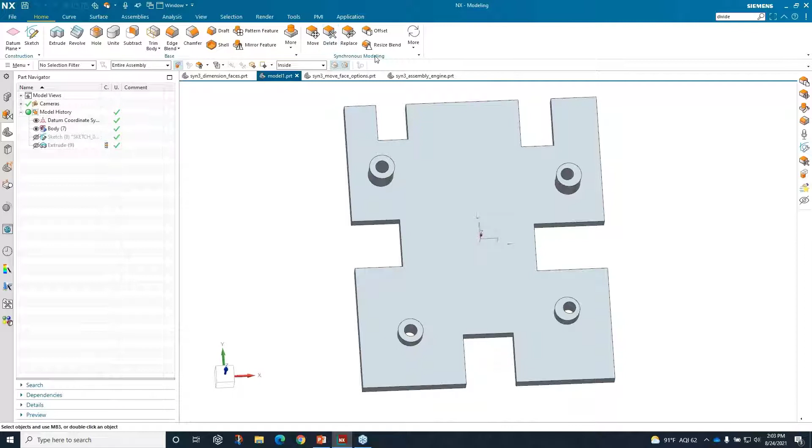So now let's jump into the subject. Turk's Tips and Tricks, NX Synchronous Technology. I'm going to pull up my NX. And what I have is just a basic dumb part. Now, I modeled this guy up, and this is what I recommend for everybody when they're going to start playing around with synchronous technology, is that you create some kind of crazy, wacky part that looks like this, and then just play around with the synchronous modeling tools that we have.

So we could click to move a face. You can use the fence select. We've got this nice little arrow here, the steering wheel, where we can move our parts or move this tab or slot around. We could orient that or change the orientation. Let me do that again. And here I'm trying to grab the vector. There we go, change the vector. And you start to get the idea.

When you just play around with it, it's really easy to use and it's quite intuitive. The trick I would say with this is while you're working is just to do it slow to start. Like when I selected these couple of pieces and I wasn't getting quite the correct click that I wanted. Well, that was my fault, not the software's.

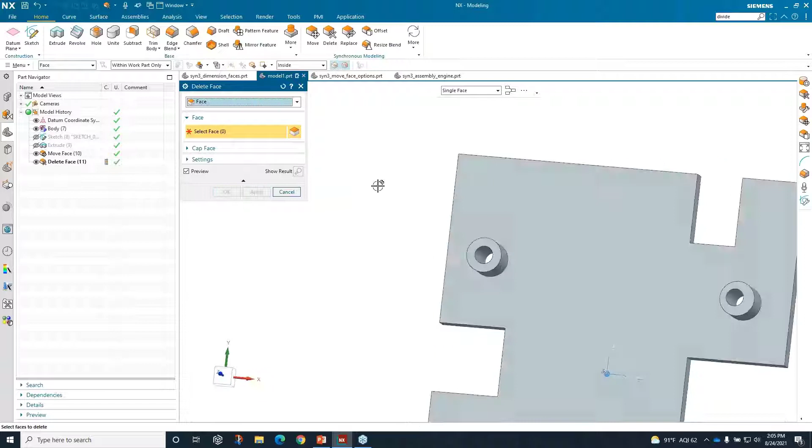Within the synchronous though, when we look at the modeling, at this tab, it's the home tab, but we look at this group of tools. Move, we pretty much get. Delete is really a nice tool, especially when you have a part like this one, and maybe there's just some feature that you want to get rid of. So we'll just select a couple faces and we can delete them that easily. We can select larger pieces and get rid of them.

This works really well if you have a step file or a parasolid that you brought in and you just want to clean it up. Now, there's some other nice tools that we have that what I find is most folks just don't think about using them. I'm going to click on the More button. You can see we've got a lot of synchronous modeling tools, too many to go over today. But check out some of these relate commands.

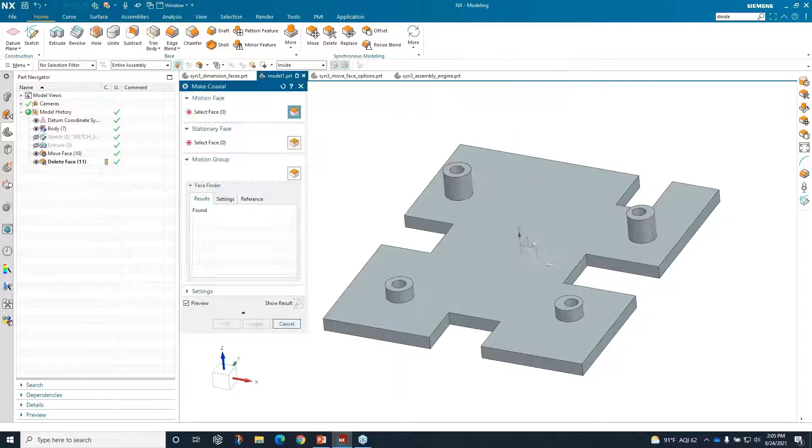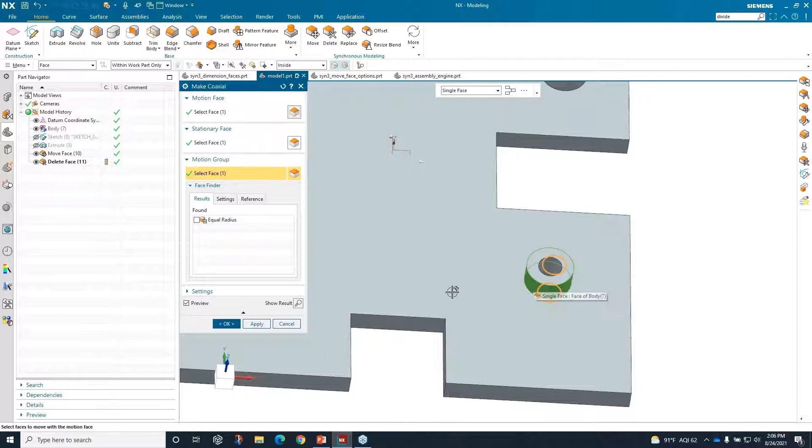Now, what these are is face relationships. So let's just take this make coaxial. Now you can see my part. These guys line up pretty good, but over here, it's a little wonky. When it comes to synchronous modeling, it's motion and then stationary. So what do I want to move? Then where do I want it to move to? What do I want to stay still? And you can see that part, or that hole, drops right in there. So again, I choose the motion face, then the stationary, and it drops right into play.

Let's use some more of these face relationships. How about make coplanar? So again, motion, stationary, that's the trick.

And I'll put another one of those in there. Good.

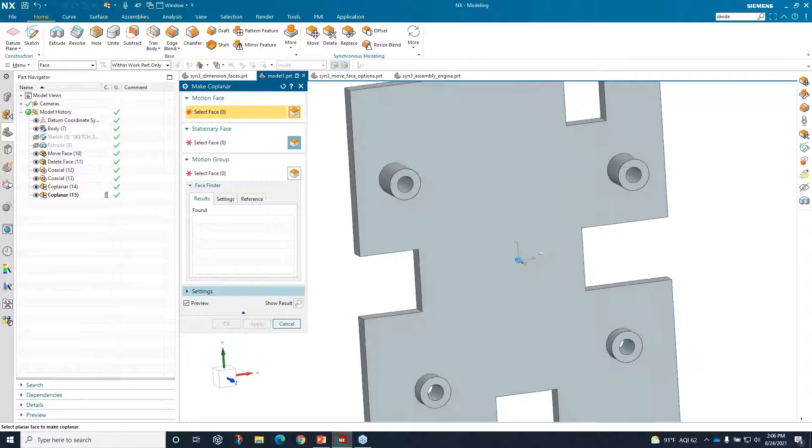This time, I'm going to just take and move one of these faces. Now, were you expecting when I clicked move that this side was going to move as well? Because I put that coplanar on there?

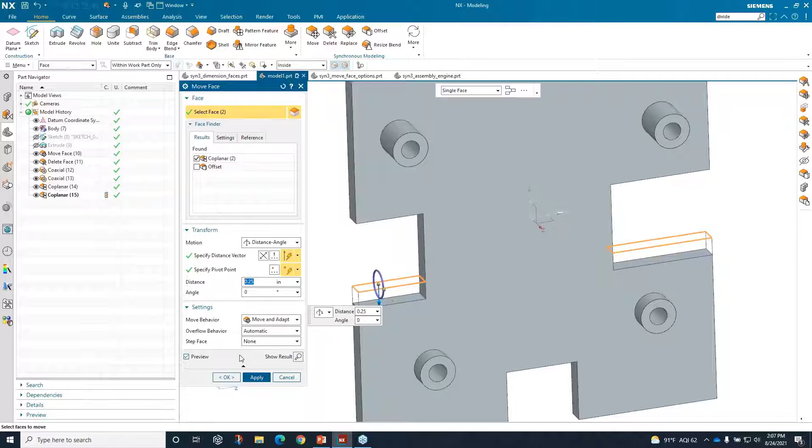If you take a look at the tool palette, move face, we have this face finder, and here's where we can choose if we want to use any of the found relationships. So I'll just click to turn that on, and there it's moving like you would expect. So again, that's the face finder, and it works really well.

We'll just hit OK. When I click back on the more and look at the relationships, we're not going to go through all of these, but just to give you the idea of all the different tools that you have. Let's just use one more.

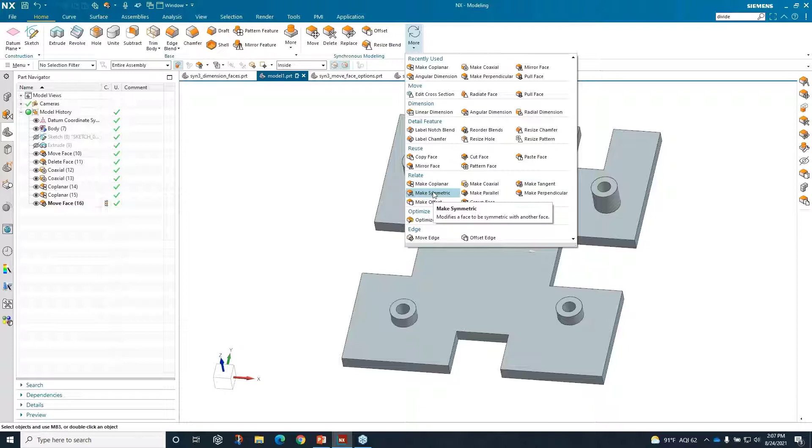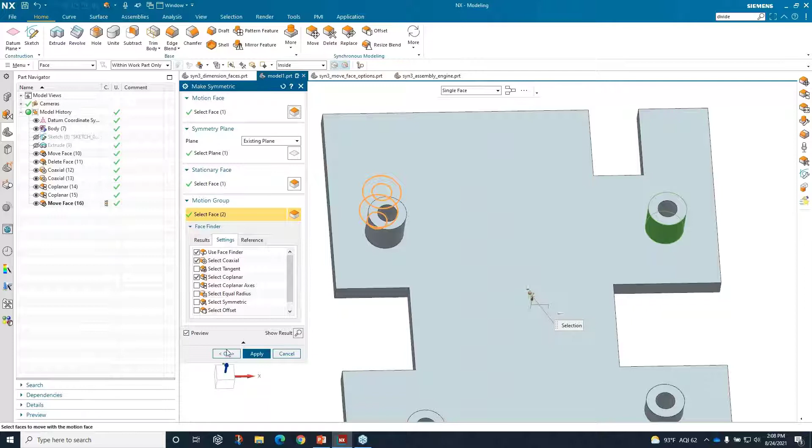How about make symmetric? So I'm going to choose a face to be symmetric. Then I'll choose my plane, which is just the CSYS. And again, the stationary. Notice it grabbed the entire thing. That's because the face finder, we've got these pieces turned on. So, okay.

Those face relationships can really make your job a lot easier. But let's look at another pretty cool tool that we have.

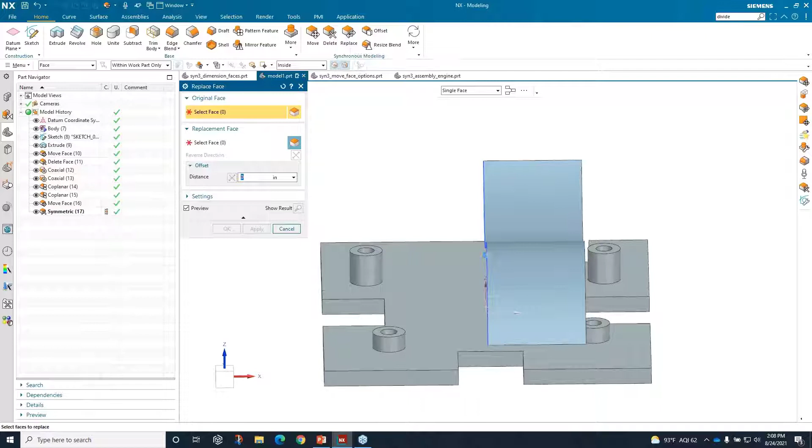I've got this sketch and extrusion. I intentionally had it where the extrusion, this little sheet, it's not actually going over my bosses. But I want to show you this really cool tool called replace. Essentially, it's going to replace a face.

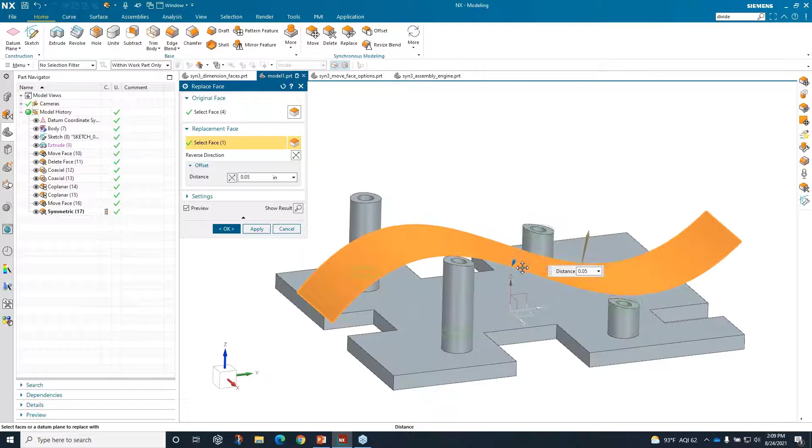So I'll choose the faces, and then where do I want the replacement face to be? I choose that sheet. You'll notice we've even got a little offset in there, or you can go reverse. But the solver is smart enough to know that even if we're not crossing, that's what we can use.

Another area where some folks will use the replace face is on a tab, or I should say a slot like this, although I suppose a tab would work just the same. Selecting one part, then another, and it tells you, hey, you've consumed that face. But it's still knocking it out just the same way that you would have expected.

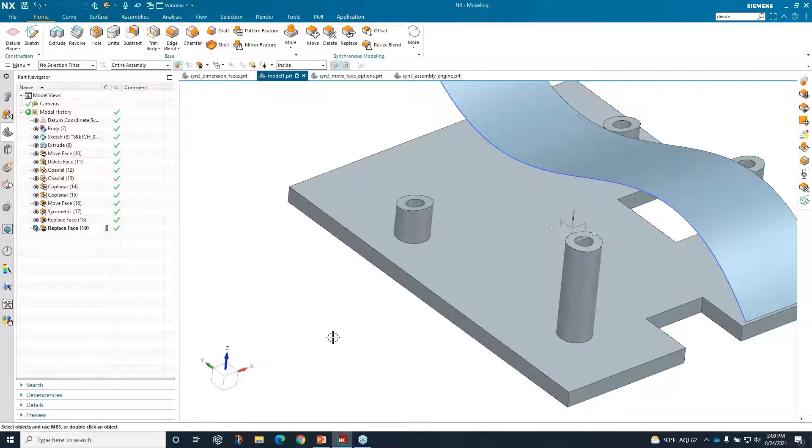So my recommendation, again, for everyone that's going to try to use synchronous, create some crazy part like this. In fact, I'll have my email address up. If you want this part, because it's kind of a silly one, then just send me an email and I'll send it to you. And then you can just play around with it, and that'll help you to get good with the synchronous tools.

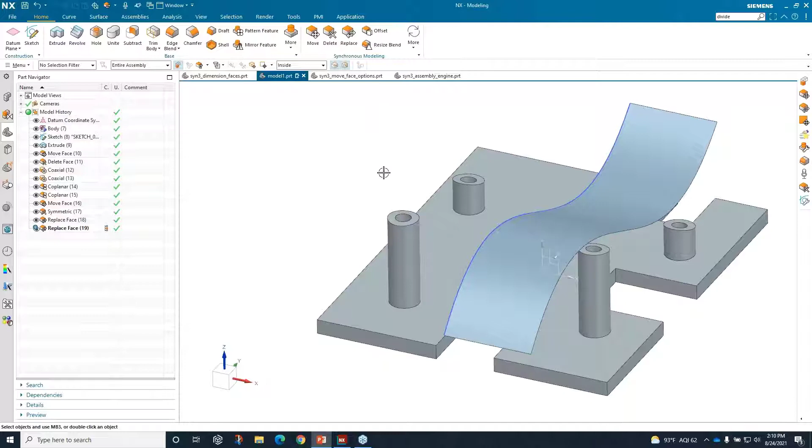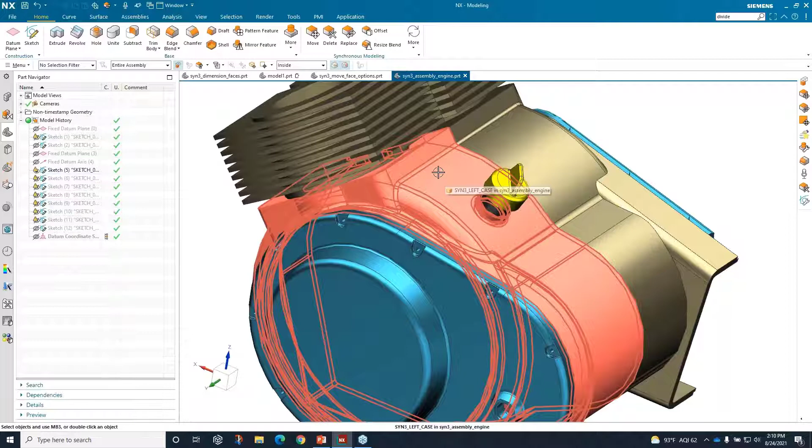Okay, so here we've got this motor. And what we want to do is make some adjustments to this part. I want to change this fill. I'm going to change the location. I want to rock it back, forward, and then angle it again. So I want to make a lot of changes to this little spout.

So I go into the part, just like you guys have done 100 times before, and oh no, the dreaded first part's just a body. Uh-oh. Can I remodel that thing? No, we don't need to, we're going to use the synchronous tools.

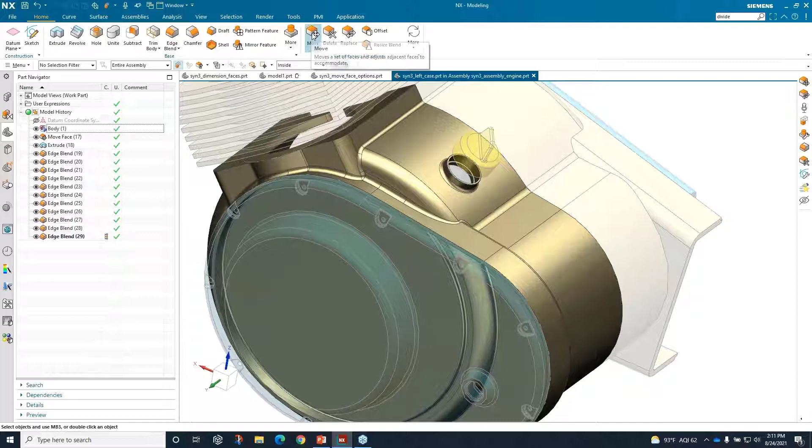I'm going to use move quite a bit because I just want to show you a number of different ways that you can use it. I'm going to put a fence select around my part. Then I'm just going to take that little orientation and set it.

I'm going to say that I want to rock this about an angle. So I choose a vector, choose a point, and there you go. Now you can see it moving.

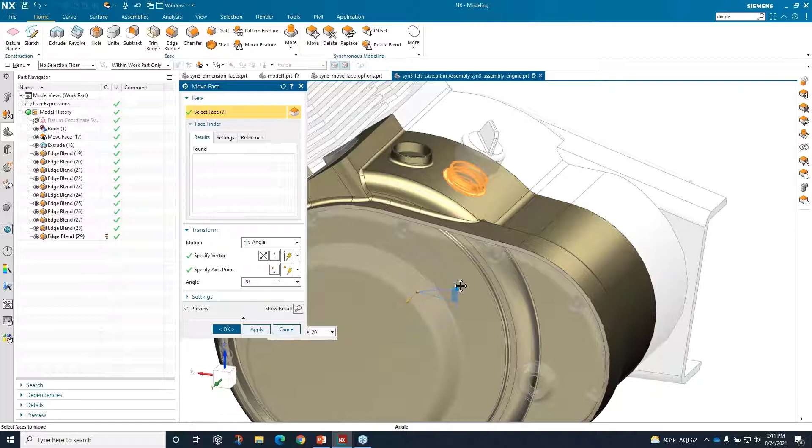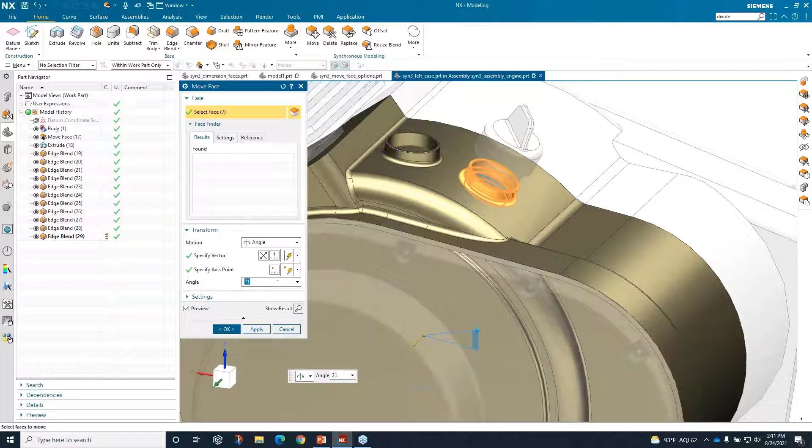I'm going to try to do this slow, but if you look at the part, this is neat how well the solver works. You'll notice as I'm bringing it up to that wall, because I've got a little bit of a radius on there, that the geometry is adjusting. That's not what I want in this case, but I just want to show you that that's what it can do. So I'll just drop that one down.

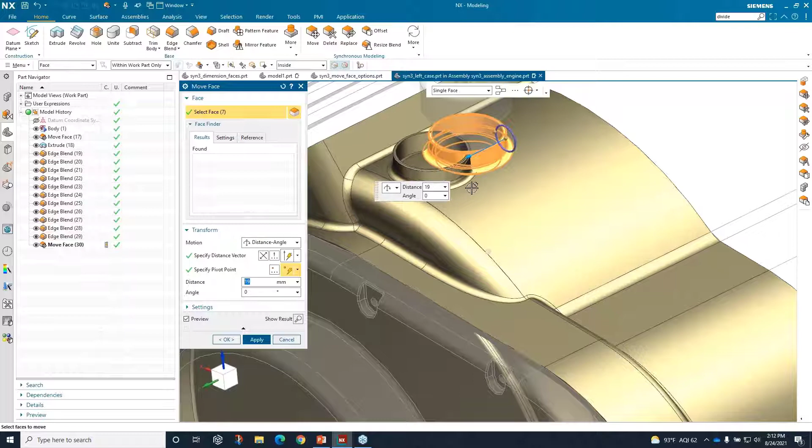And let me move it again. So I'll just do the fence select. This time I'm just going to put it in a vector, a direction. And what I want is I want it to come across that blend just a bit. Get where I can see a little better.

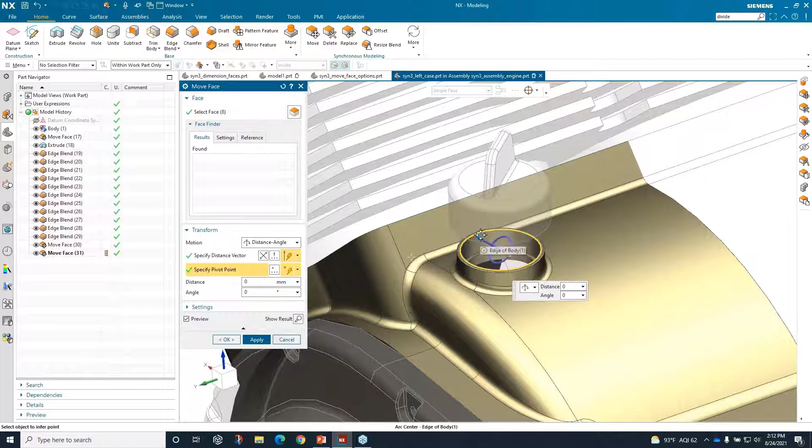And then we want to take this part and rotate it yet again, so we're really trying to break the geometry. I'm just going to set the origin point. Once you click on the origin point, you get this little pop-up giving you the different planes, or as you've seen me select, the different vectors. So I'll choose the XY plane, and then rotate this.

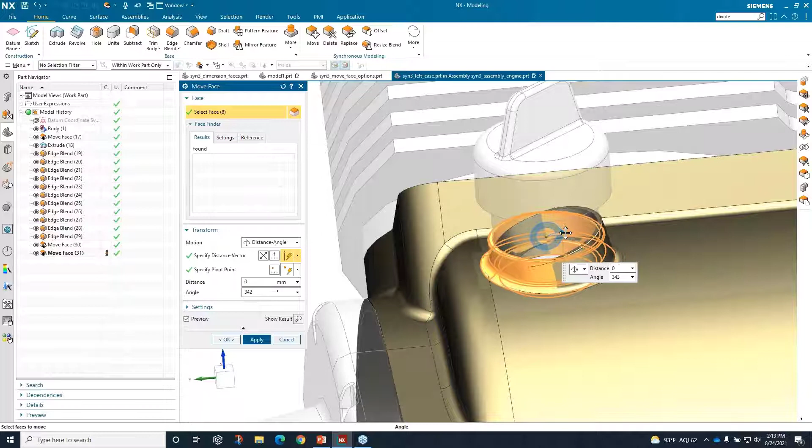Isn't that cool, that I'm able to rotate this as much as I need to? Of course, we could rotate it beyond the point of it being useful. Let's take it to 350 for 10 degrees, and done.

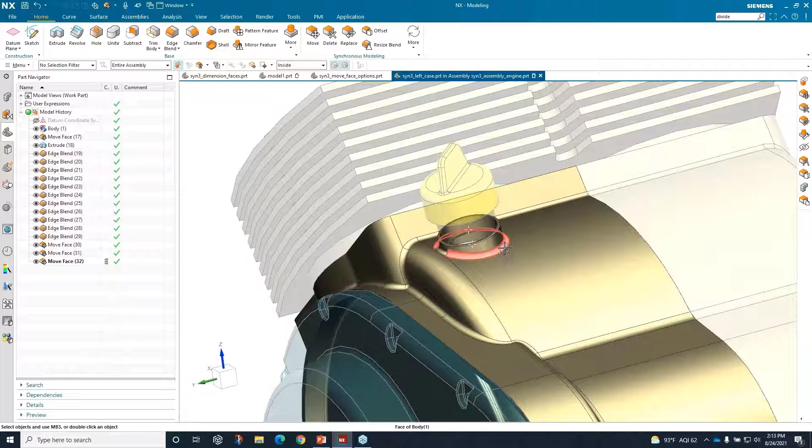Just that quickly, we were able to take that spout, kick it up, forward, and then put another bit of rotation on there. This works really well if you're doing concept work. Maybe you need to take 4 different concepts. Using synchronous modeling, you could quickly create each of them and then just make adjustments with a reference set.

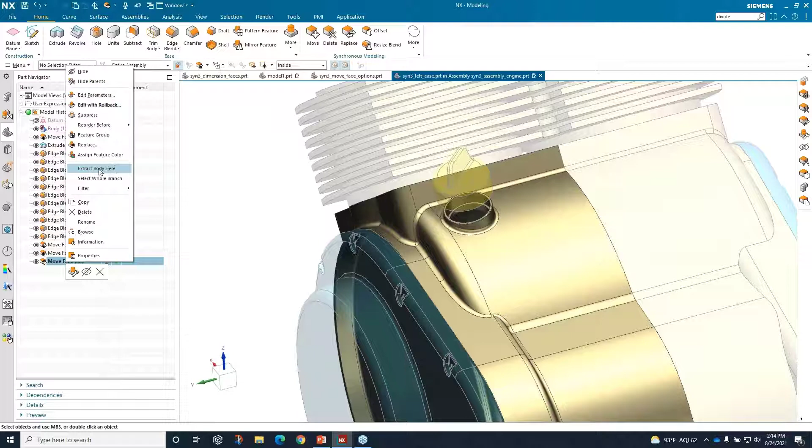And then just to show, if I right-click on one of these features, I can choose extract body, and it simply makes a copy of the body I had just created. I can modify it again, new reference set, and I'm ready to go. So that's not a synchronous tool as much as it is just a really neat one.

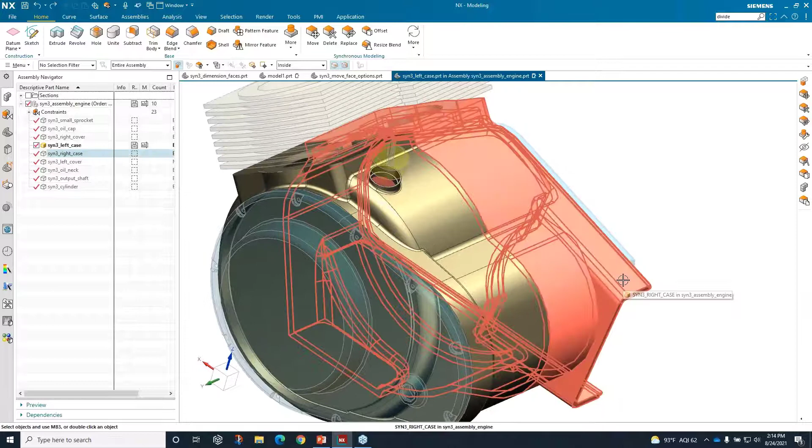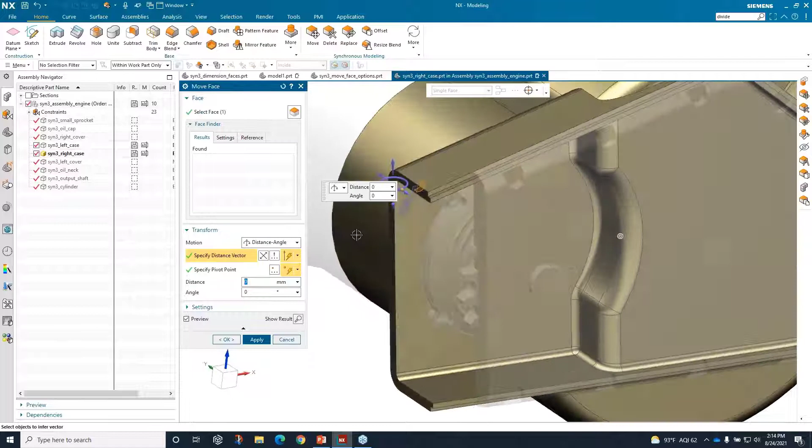Let's stay in this part, and we're going to move another face. So what we want to do is move this face in and just kind of clean it up a little bit. I'll choose move face, and this time I'm going to choose specify distance vector because this face is a little funny and I want to make sure I get it just right. I'm also going to go to my settings and choose extend incident face. Just something else to note, it gives you a little preview of what each one of these will do.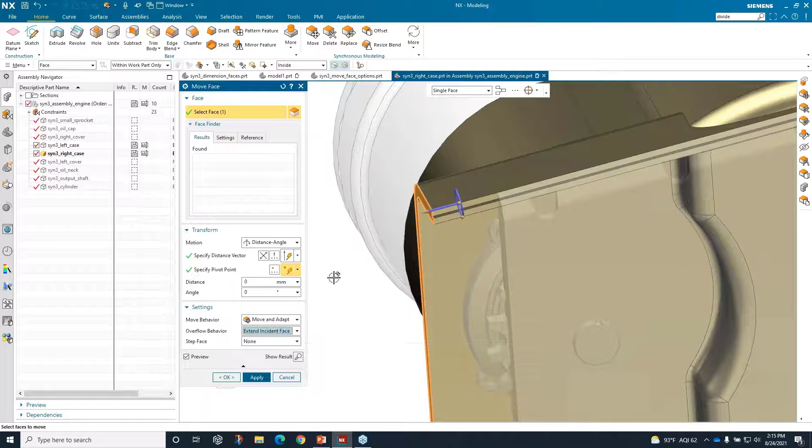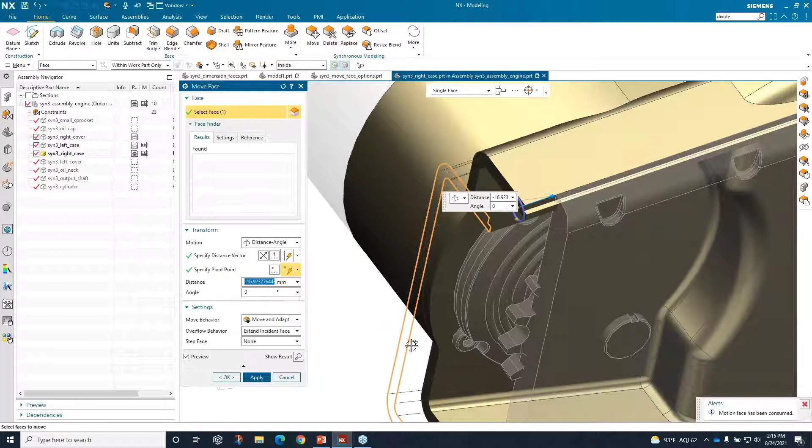And then when I go to my distance, this time I'm going to right click and say snap to an object. I don't know what the distance is between these two, but I don't really need to know, I'll just snap right to the object. The face goes back, but here's the key using that extend incident face: it takes and it hugs that cylinder, or hugs that radius. So now my part is looking like I would want it to, and it only took just a couple steps.

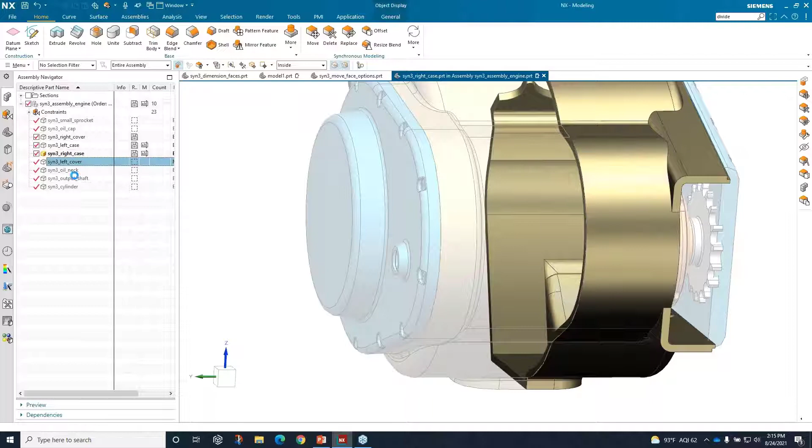Let's briefly go over to our cover. Now here I just want to show you, we've seen the move. So if I choose this move, do you notice the thickness is changing? So that's move, you're literally taking a face and moving it.

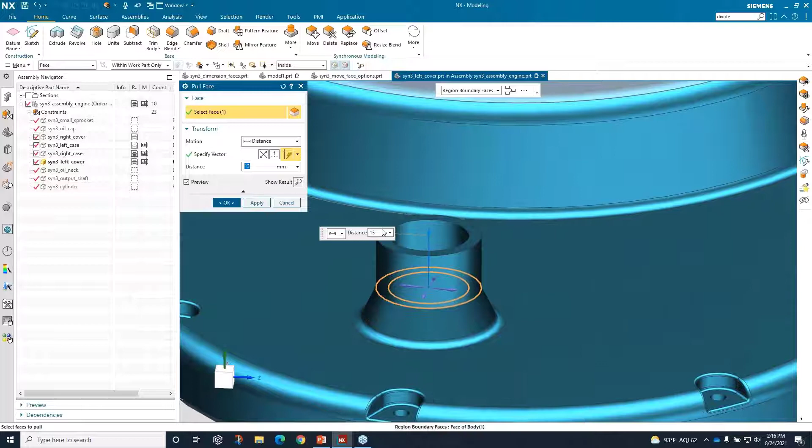That's where there's another tool that we have called pull face. In this case, I'm literally taking a face and pulling it. So it went from a cone, now I pull it straight up and it's more of a cylinder. So just something kind of neat to show you the difference between the two.

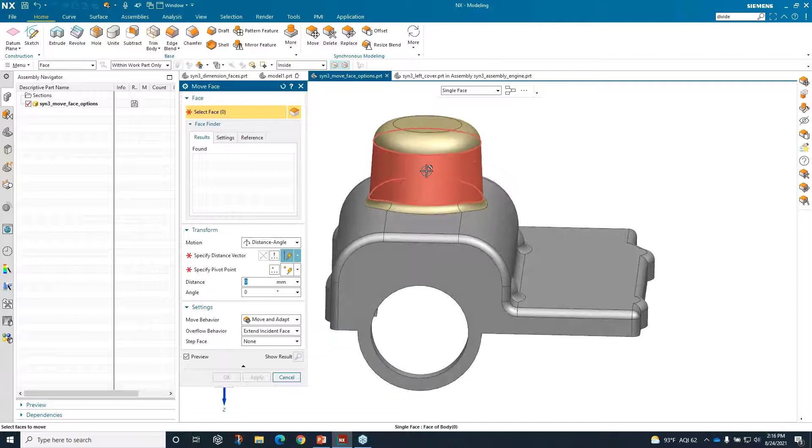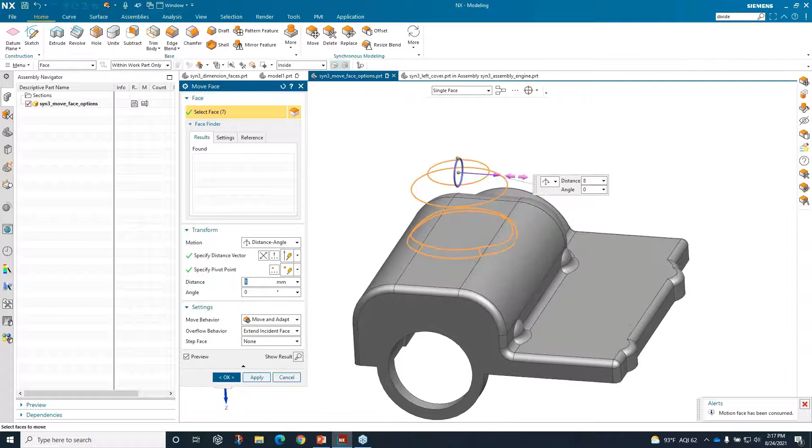Okay, let's move another part. I want to take and move this brown portion, say 15 millimeters to the right. So I'll just do a little fence select around, choose my origin, there we go, there's my vector. And as I start to move it, so I need to get it to 15. Uh-oh. That is weird, isn't it?

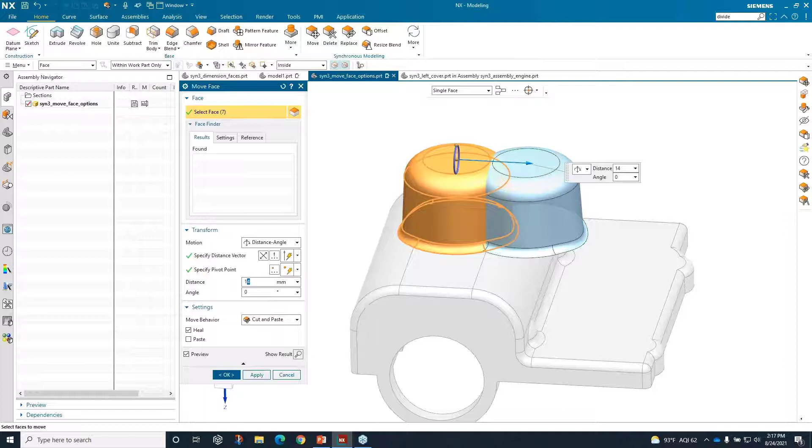What's happening is it's moving and it's adapting. So as the part moves over, it's really trying to adapt or hold on to that face. That's not what we want. So instead, I'm going to change the move behavior to a cut and paste, and then I'll choose paste. And that gives us exactly what we were looking for. Again, the cool thing about this is it's taking those edge blends and adjusting them.

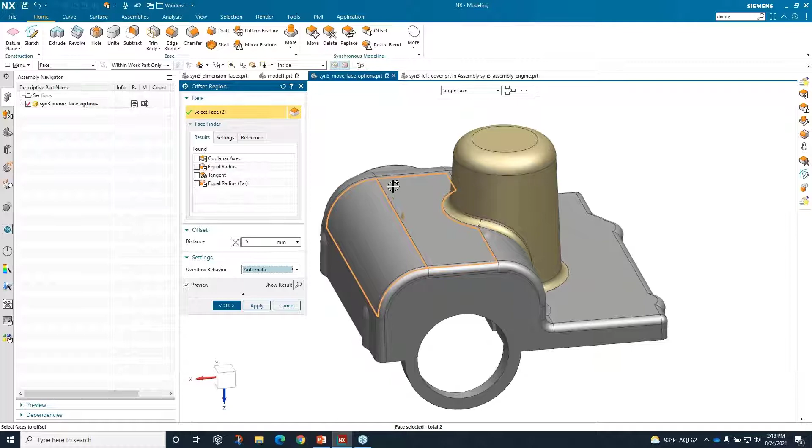Now, while we're looking at this part, one of the biggest ways I've used synchronous technology, or synchronous modeling, is when I'm concerned about GD&T. So let's just say we had this part and it was a profile of a surface at an MMC of, let's say, 0.5 millimeter. Well, maybe I want to model the MMC and the LMC models. This is where synchronous can really come into play. I can just select a couple of the faces and look at that, MMC, LMC, with just a button click. So that's one of the nice ways I've found to use synchronous, with that LMC, MMC, GD&T.

Lots of acronyms there, but I'm pretty sure you know what they are.

All right, let's move on to another part. And again, we're going to just keep on moving our parts.

I'm going to take this bottom piece, make it my work part, and hide the top. What I want to do is take and angle this up.

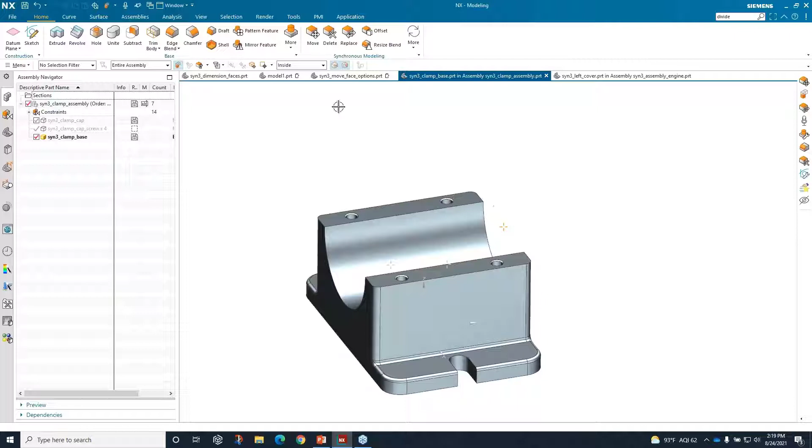I'll choose move, I'll choose the one cylinder, and then I'm going to choose one face. But instead of coming over to pick this face, just to show you, I'm going to choose - hey, it found one that's coplanar. So that's what I want, and you'll notice it selects it as well.

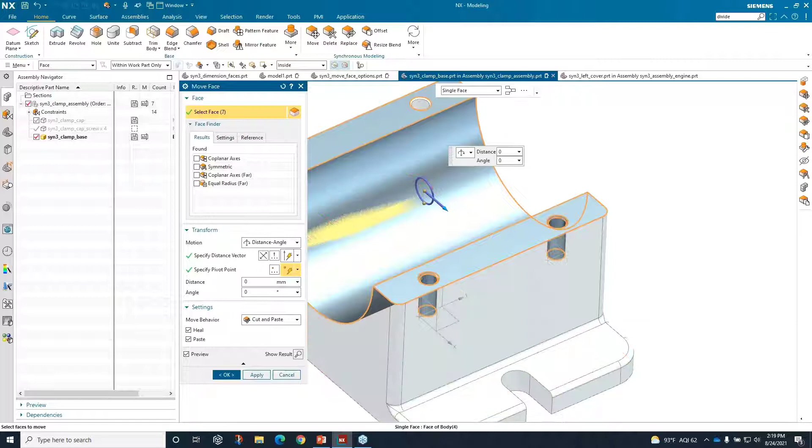Or if we were to choose a hole, and we pause for just a second, this is where we could choose hole faces. So you could pick once, hole faces. Or we can just come and do the fence select. On an easy part like this, perhaps that's the way to go, but just to show you the differences that we have.

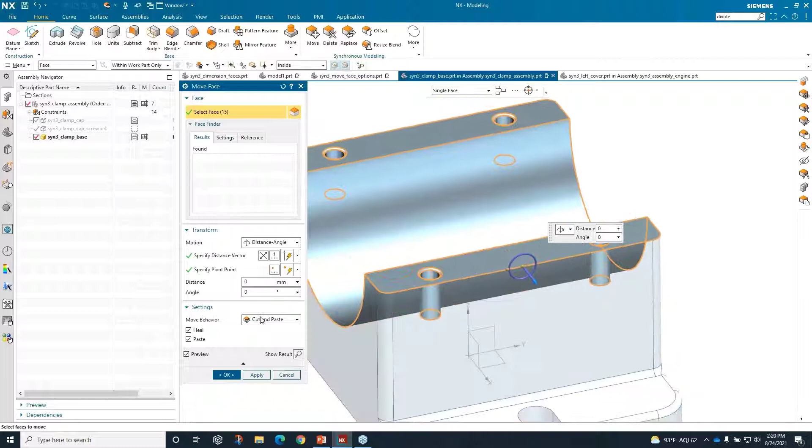I'm going to change my origin point and also the plane. I'll change this to a move and adapt. And I just want to kick this part, let's say 10 degrees, not millimeters. And we'll just say okay.

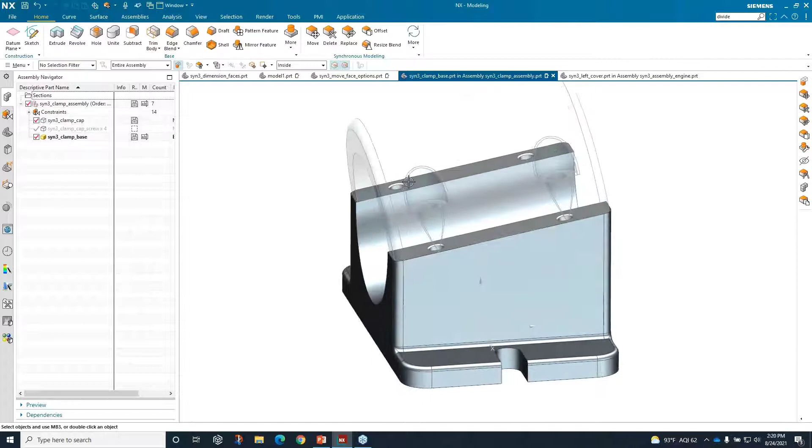If I bring up my other part, I can see, because I had an assembly constraint on there, that it moved along with the other part just fine. Most of it did, at least. But let's make a couple more adjustments to our part.

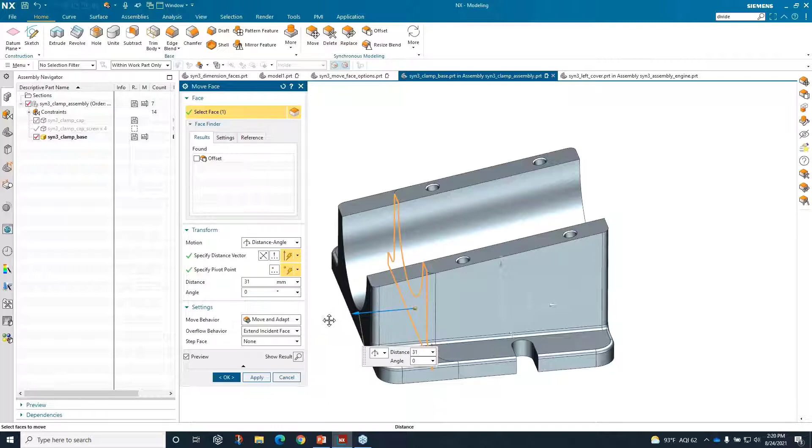Let's just say that we want to stretch this guy out maybe 30 millimeters. And then we want to take this slot and we want to move it. So I'll just do a fence select.

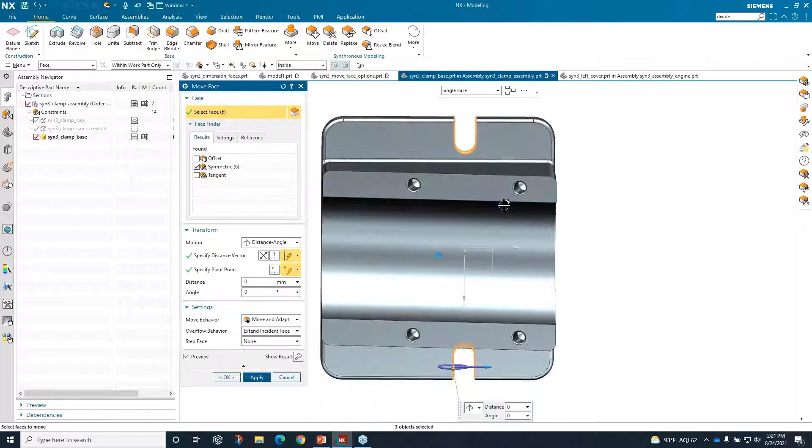Let's see, uh-oh, look what it's finding. It's saying, hey, there's another one of those symmetric. And we'll move that. And then you need to just go to automatic.

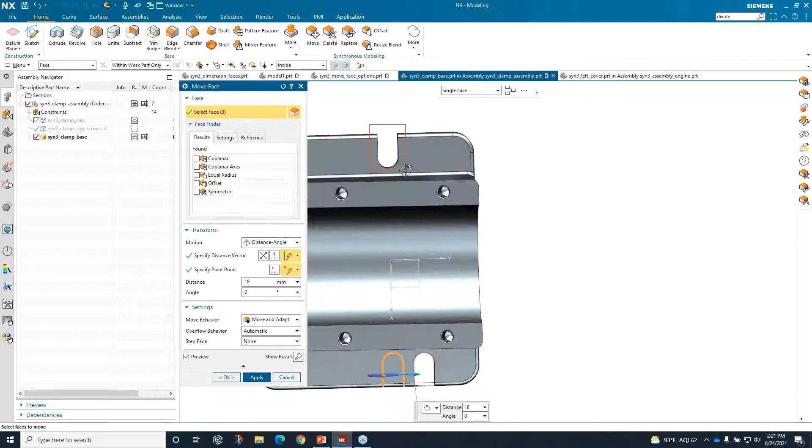I'll just do a thin select on it. I'm not sure why it didn't just grab. And I'll take that 18 millimeters to the side.

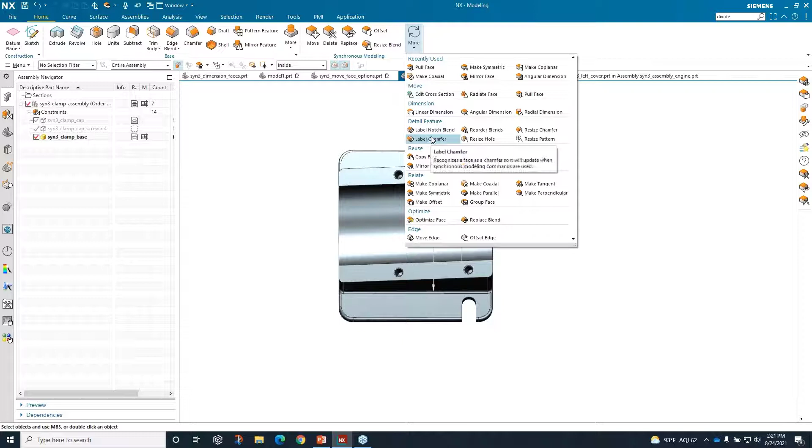And then we want to take these slots and we want them on the opposite side. So we're going to stick with the synchronous. And this time I'm going to go to the reuse tools. Here we go, mirror face.

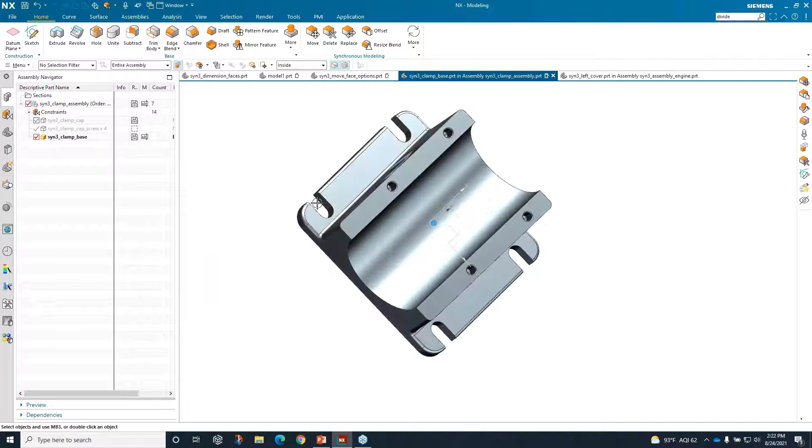Just select these. Specify a new plane - I'm just going to use the bisector. Okay. And what you're getting to see is just how quickly we're able to make those adjustments.

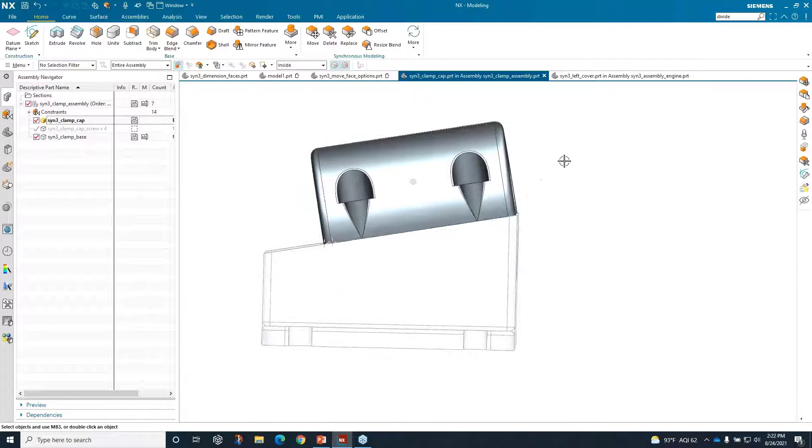Now let's go back to our cap. I'm going to take the cap and make it the work part. And even if I were to just move that 30, it's still not going to line up just right, is it? You can just see it from the side - the angle is just not very pretty. Well, we want it to be dead on.

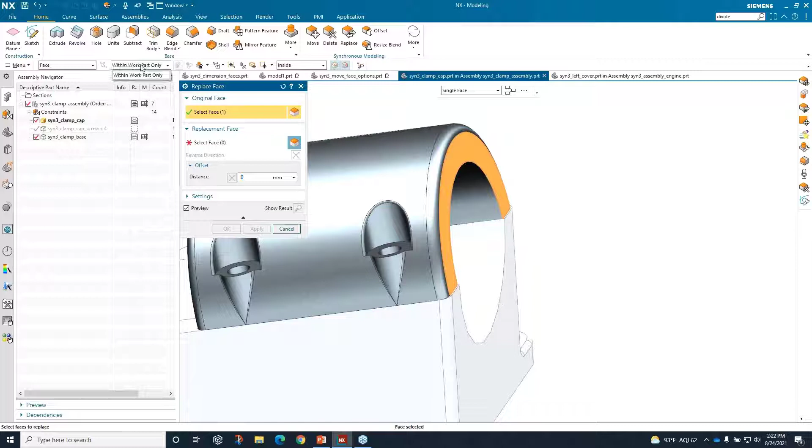I'm going to use the replace face tool. Now, this is what's awesome about this. I choose one face - I want to choose this face. That's what I want it to go towards. Of course, it's in a different component, so I'll just say, how about let me select within the entire assembly.

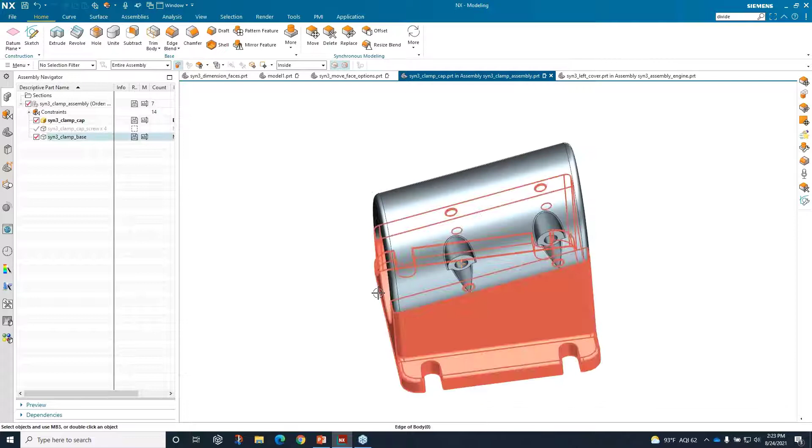And apply. Do the same thing over here. And OK. Then it would just be a matter of taking this little hole that we have and stretching that out as well. But I just wanted to show you how fast you can move your parts around using synchronous modeling, especially when it comes to that angle.

How would you have done that in a normal sense? Well, you'd have a couple of sketches to adjust for sure, wouldn't you?

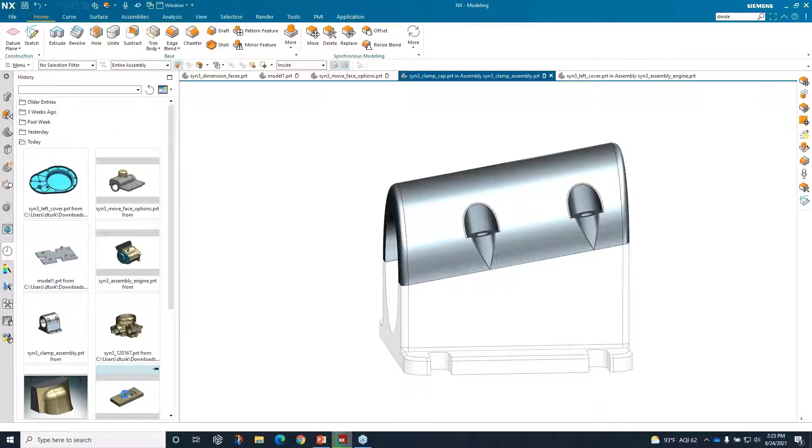Okay, we're going to look at another nice synchronous tool, and it's the cut, copy, and paste. So just like in Windows or in Word, you'll cut and copy things. We can do the same thing here.

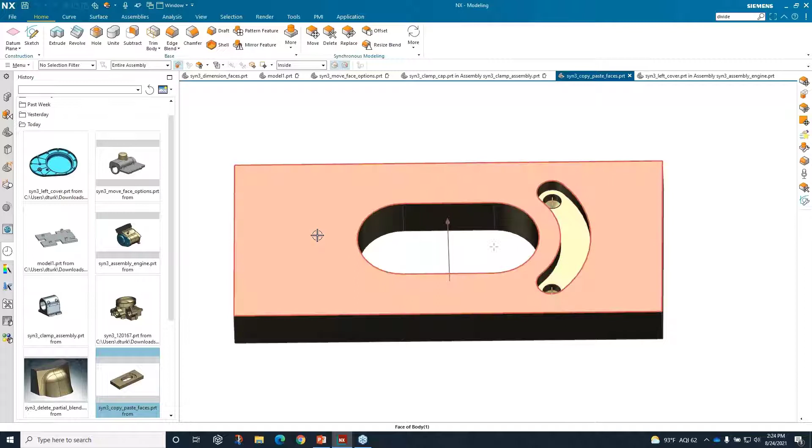So let's just say that we want to have this little slot. We want it on the opposite side, but we want it to be deeper. Well, there's a couple different ways you could do it - you could mirror it and then offset it, or we could use some of these tools.

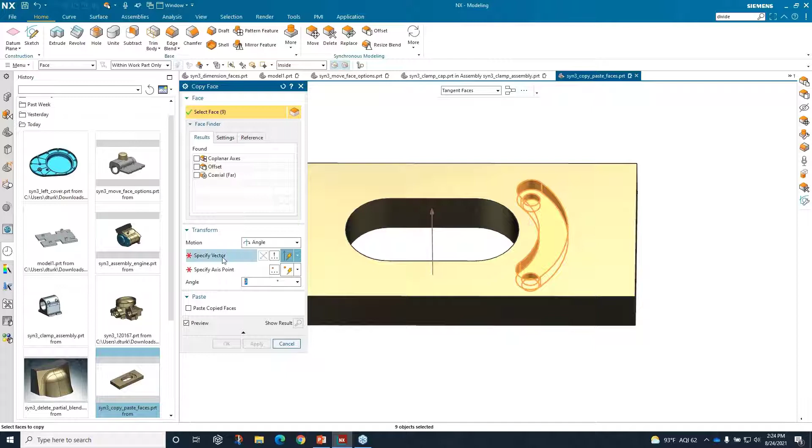I'm going to go copy face, and I'll just select around the whole thing. In this case, I want to rotate it about this axis that I've already created. And we'll just take it to 180. Okay.

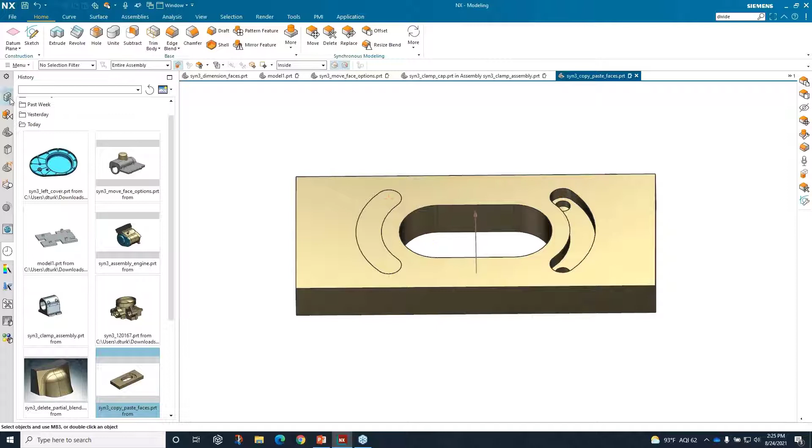A little bit different maybe than what you were expecting. You may have thought, well hey, isn't that going to cut that out? We could have turned that toggle on to do that. But in this case, what we really want is to show you that you just pasted those faces.

So then I could come into these pasted faces, do a quick offset, and then bring the body back. Well, now we need to attach it.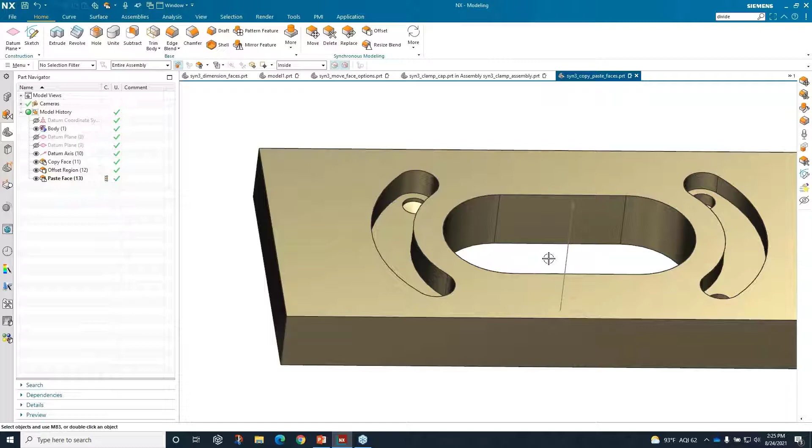And this is where it might be a little bit different than what we're thinking, and that is that we have to go in and then paste the face. So the target, my solid tool, that face, OK - and there we have it. So really nice tool that we have.

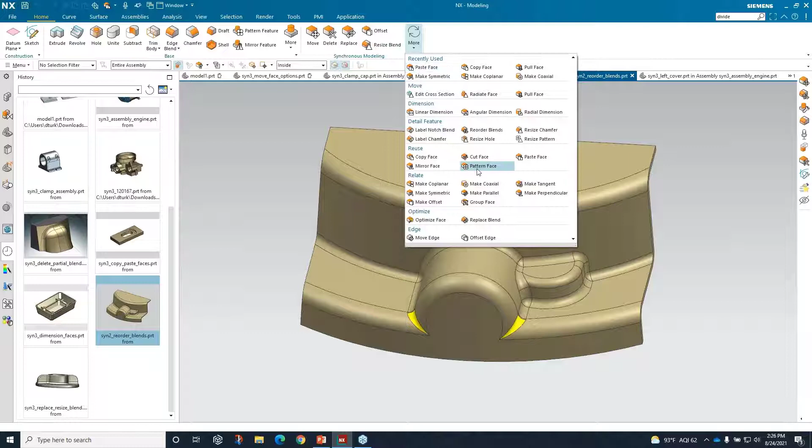All right, the next part we're going to look at has to do with blends. We're going to use a really nice tool called Reorder Blends. If you just take a look at our model, isn't this your nightmare? If this was the part you had to create a tool for, it's just that kind of ugly blend. It doesn't make sense why they did that - they just put this blend in last.

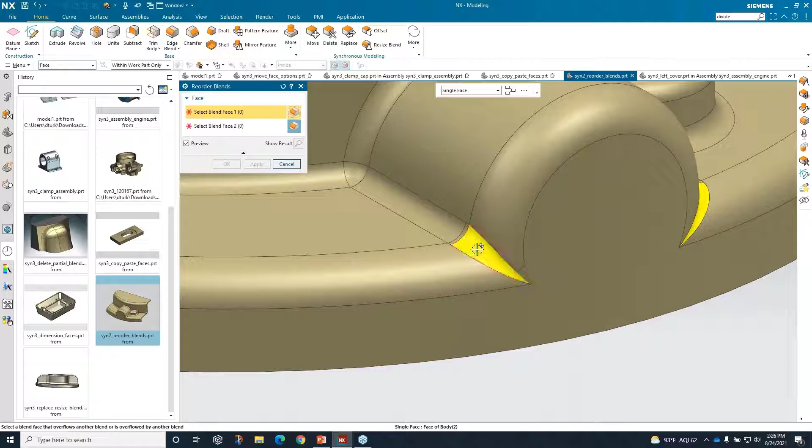So the Reorder Blends tool, you select the blend and it shows you an alternate, which is exactly what we would want, right? Select and OK, so really quick. Otherwise, what would we have had to do? Delete out all the blends and then put them back, perhaps?

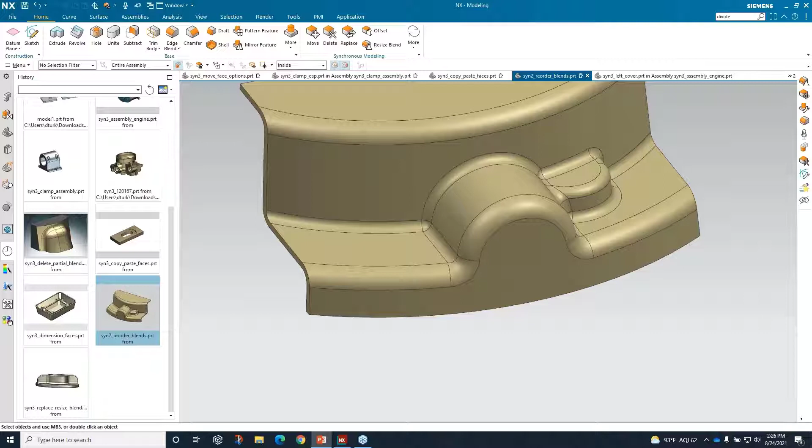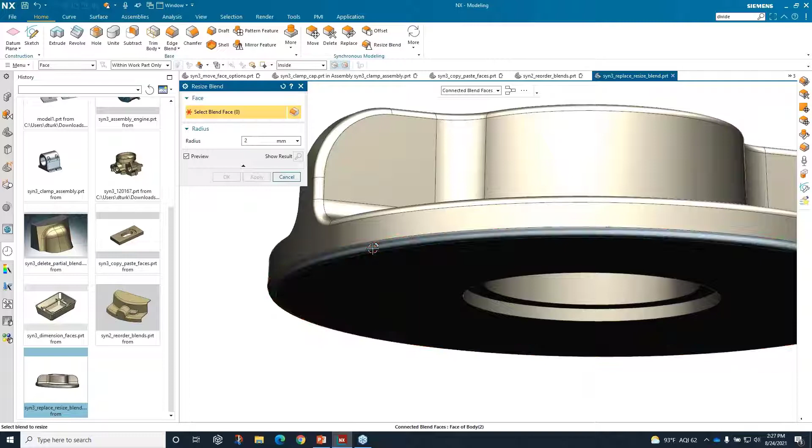Okay, let's move on, because I'm going to be running out of time here. There's another cool tool that we have, and that has to do with resizing and replacing blends. So the first thing I'm going to do is choose Resize Blend. I'm just going to pick this blend on the bottom - it's 1 millimeter, I want it to be 2. Nothing could be easier, right? Piece of cake.

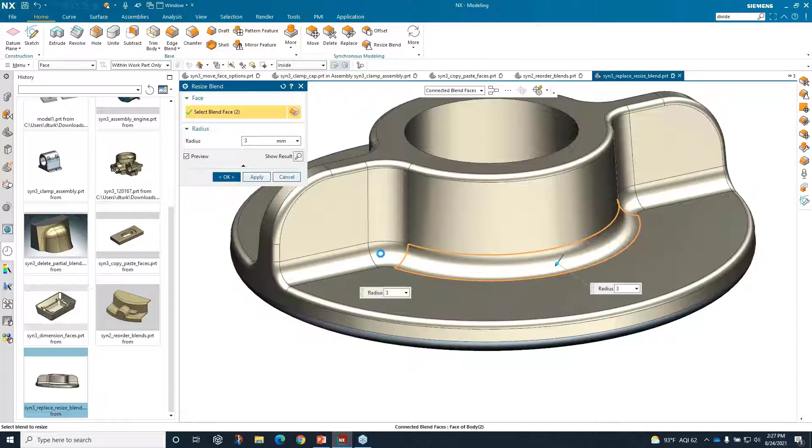So let me take this larger one. Uh-oh, why didn't it select all of the pieces? Oops, I clicked the wrong button. So I select this first - again, why didn't it select everything? Why won't it let me select the middle pieces? Well, let me just try it anyways. So I put in 3, and nope.

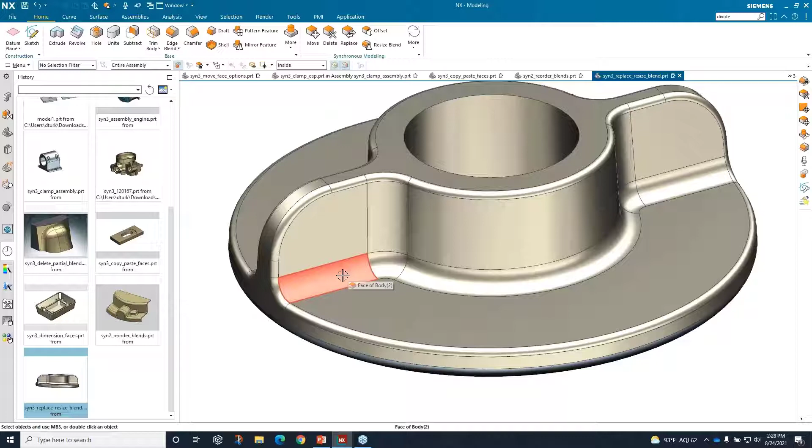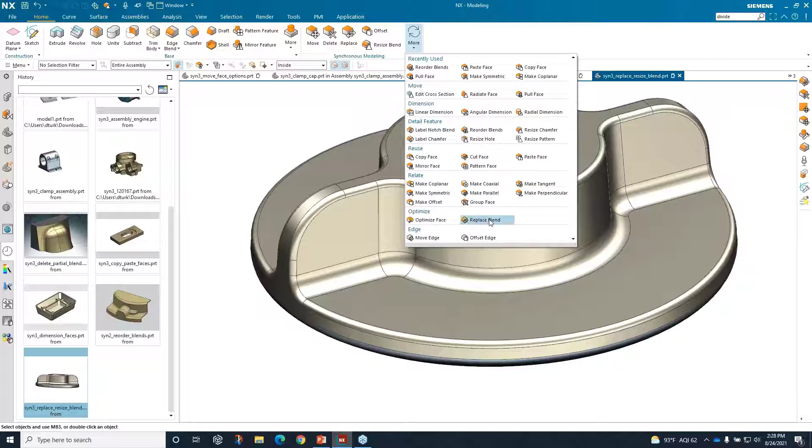See what it is? It looks at these blends that we have and it can see that from the translation, there's a bit of an error. So typically what we would do is we would just go in and delete these guys right out of there. Well, that's what we maybe would have done in the past. What we'll do now, though, is we're just going to use the tool Replace Blend. So Replace Blend, here we go - it's underneath Optimize, and it's pretty cool.

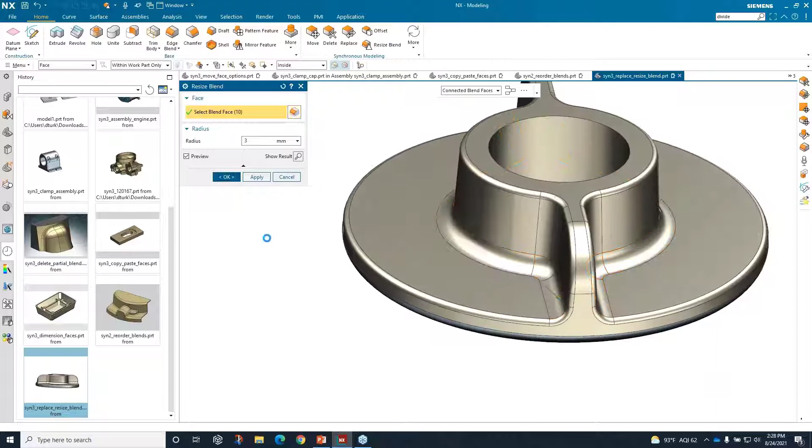I just select the whole thing. Okay, did it work? Well, let's resize our blend and see. Look at that - pick the entire side. Excellent, we'll change it to 3. And I can see it wants to - with the AI, it wants to pick the other side, so we'll accept that. Hey, there we go. It's just another tool that's going to really speed you up, especially when you're dealing with different kinds of geometry, maybe that come in from a STEP file or a Parasolid or what have you.

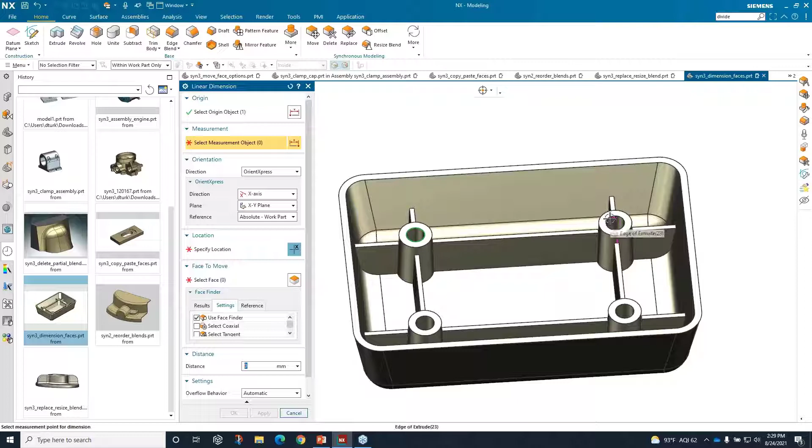Okay, the last thing I want to look at, due to time - the last thing I want to look at is that we have the ability to add dimensions. So we've got this dumb part, but just to show that you could come in here and start to dimension your part.

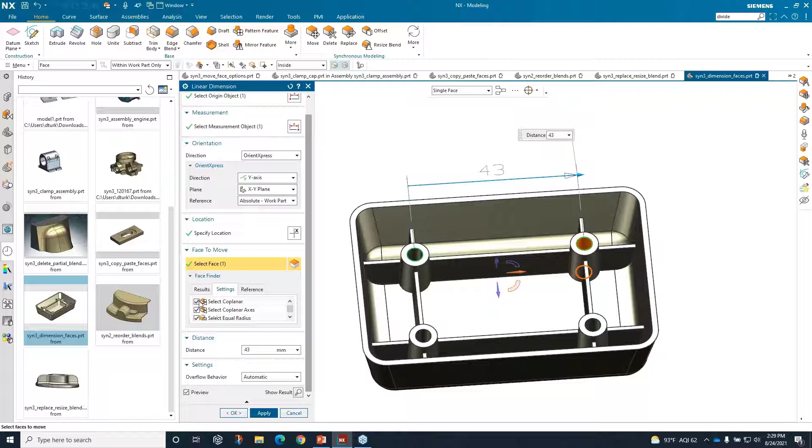So make some movements. And we look at that and go, well, that's not exactly what we want. So maybe we need to select some of these other sides to get it to move. And coplanar tangent. Okay, well, maybe I needed to select more on that. But you get the idea.

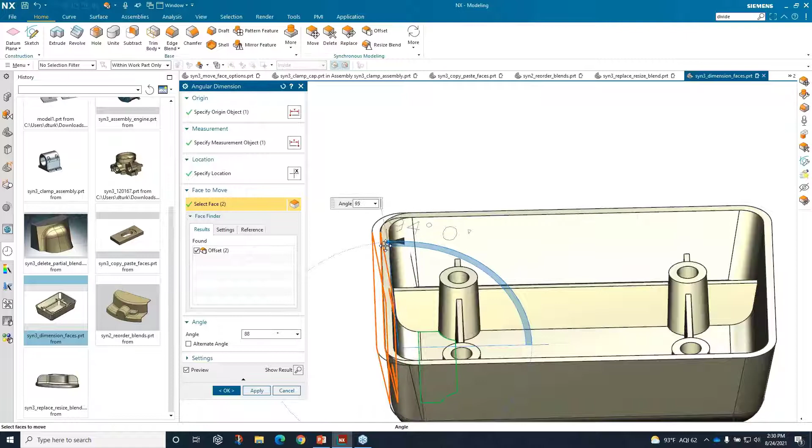Let me add another dimension in here. I'm going to put an angular dimension, so from the floor to one of the walls. And here we can go ahead and make that change. Now, if I look at that, that's not really what I want, is it? Not ideally - I don't want to put this on there twice. So I'll just turn on the offset so it recognizes an offset. And then I'm able to come in and change that angle as needed.

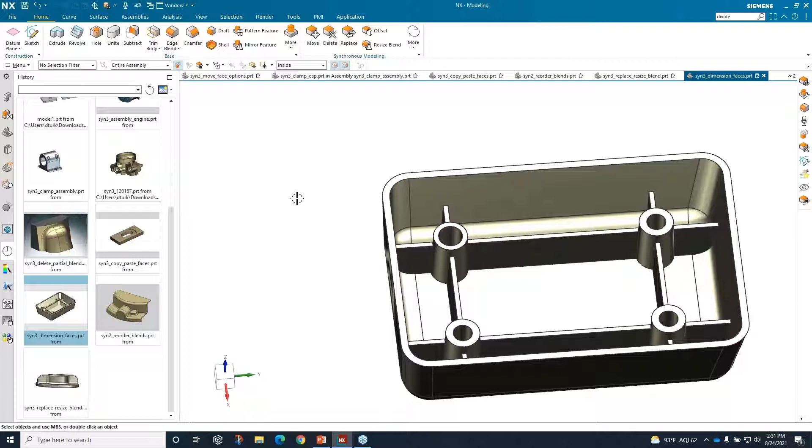So with the dimensioning tools that we have - linear, angular - we can come in and add radial dimensions, change it to a diameter, and you start to get the idea. It just gives us a lot of different control over our parts. There's a lot more that we could have shown with Synchronous, but the issue is we've got about half an hour, so those were the coolest things that I thought to show.